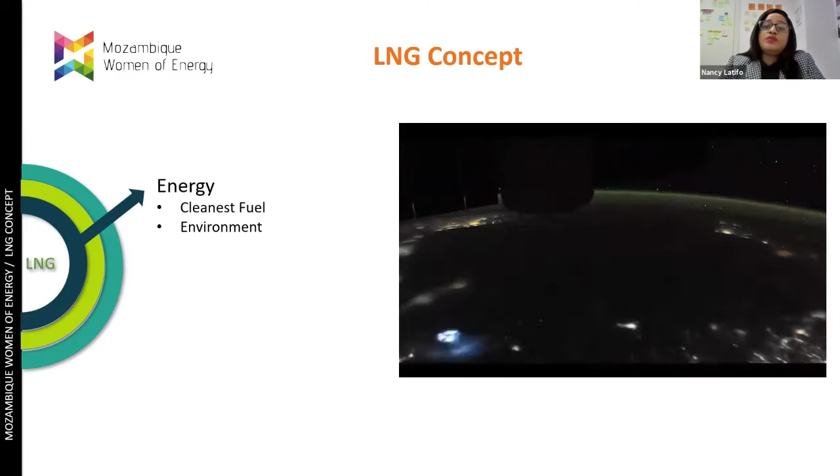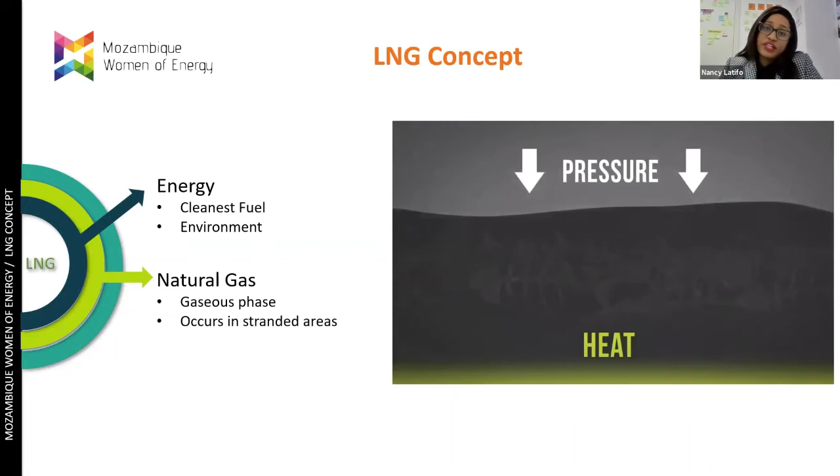Natural gas is basically composed of methane with smaller quantities of other hydrocarbons, and was formed millions of years ago when dead animals sank to the bottom of the ocean, were subject to intense heat and pressure, and were kept underground for millions of years. That's where we have natural gas. This gas is normally found in rocks called reservoirs that have little spaces called pores, that keep the water, the oil, and the natural gas. These are kept in by the impermeable rock called cap rock.

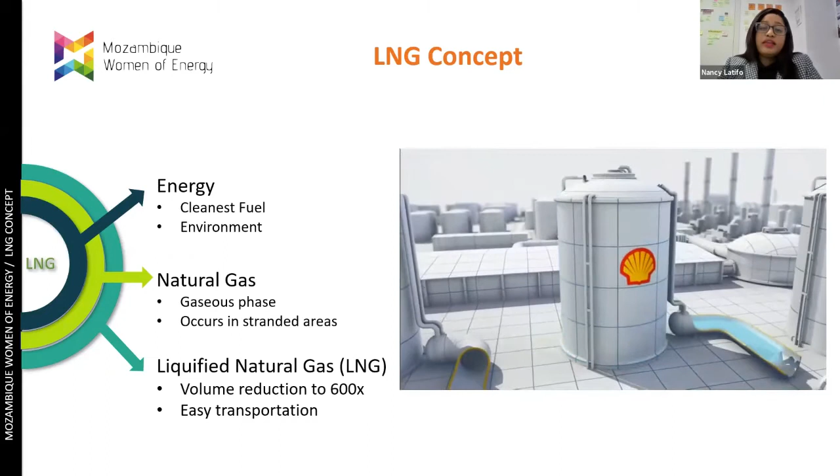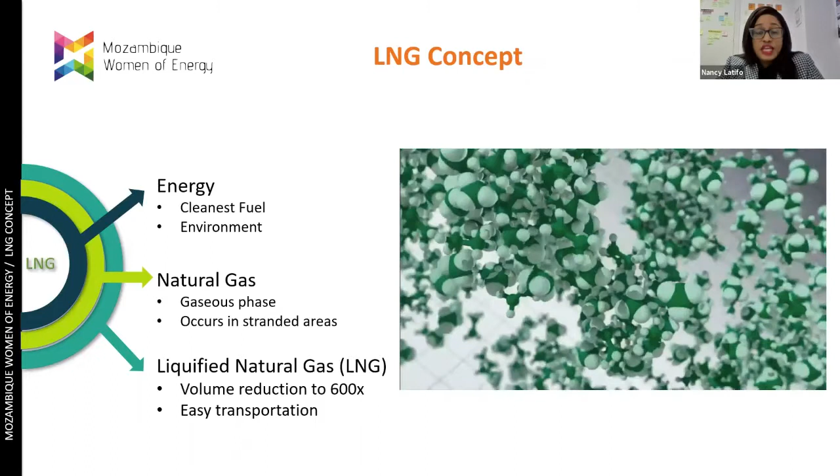So what is LNG? LNG stands for liquefied natural gas, and is the liquid state of natural gas after being cooled to an average temperature of minus 162 degrees Celsius. When we cool down this natural gas, we are solving the volume problem because we are reducing it 600 times, making transportation much easier and expanding the market of LNG. This LNG can be produced in two types of plants, onshore and offshore. And I will start explaining the onshore plant.

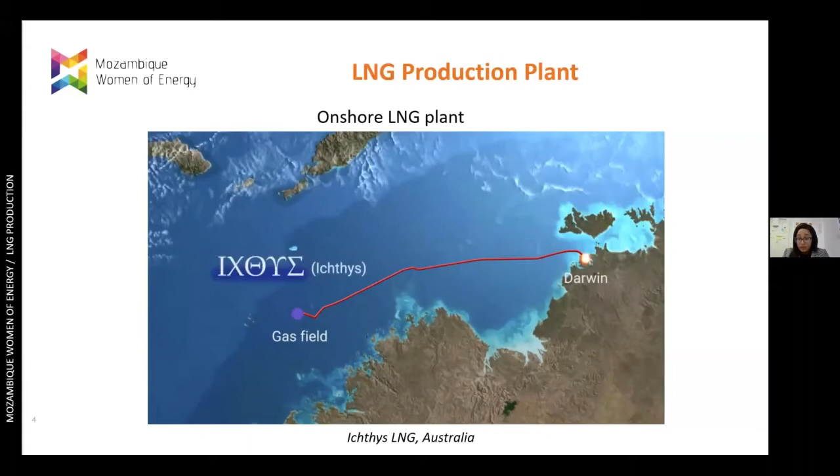And here we see the project in Australia. This plant is normally located on land, close enough to the shore to facilitate the offloading process. This plant has 2 liquefaction trains, making a capacity of 8.9 million tons per annum. The operator is INPEX with Total and other Australian subsidiaries. This onshore plant normally occupies a lot of space because we need to make sure to respect the environment and the way we produce the LNG. The gas field is called Ichthys, and that's how the project came, and we call it Ichthys LNG, located in Australia.

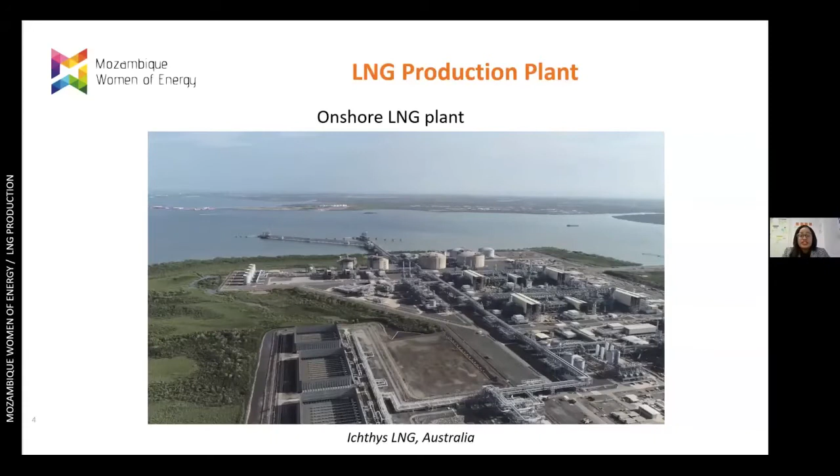This floating platform is normally located in the sea, close enough to the wells, solving in this case the problem of using much space to have an onshore plant.

The turret is normally the link or what joins the platform with the wells, and this is a fixed structure. In case of bad environment conditions, this platform can rotate to avoid damage to the infrastructure and the equipment, making sure that production and the way of operating this floating platform is not compromised.

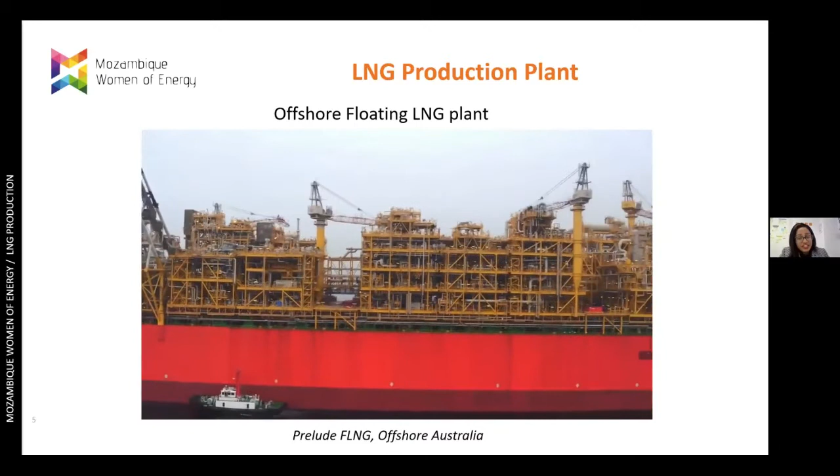For your curiosity, we also have the Coral South project, an offshore plant currently being constructed in South Korea by Samsung in consortium with Technip and JGC. This platform will have a capacity of 3.4 million tons per year, a little less than Prelude, but it will be the first LNG ever built in Africa, which makes Mozambique a really great potential to explore natural gas.

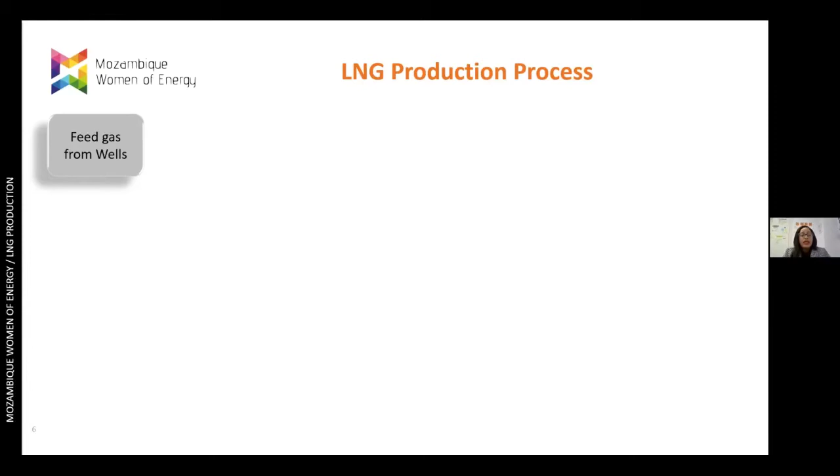Now let's take baby steps and start explaining the way we can produce this LNG. The gas comes from the wells, enters the FLNG, the onshore or offshore plant, and goes to the first unit that we call the inlet receiving facilities.

In the inlet receiving facilities, we have the first separation because the gas comes with a lot of impurities - sand, slugs, liquids, mercury, and many others. It's important to remove these impurities to make sure that when we get to the heart of the process, we will only have methane, which is what we want to transform to liquid.

After this first separation, the natural gas is sent to the second unit, the pre-treatment. In the pre-treatment, we have a separation of sulfur, carbon dioxide, water, and mercury. These components have to be removed because of the operating conditions in the liquefaction unit.

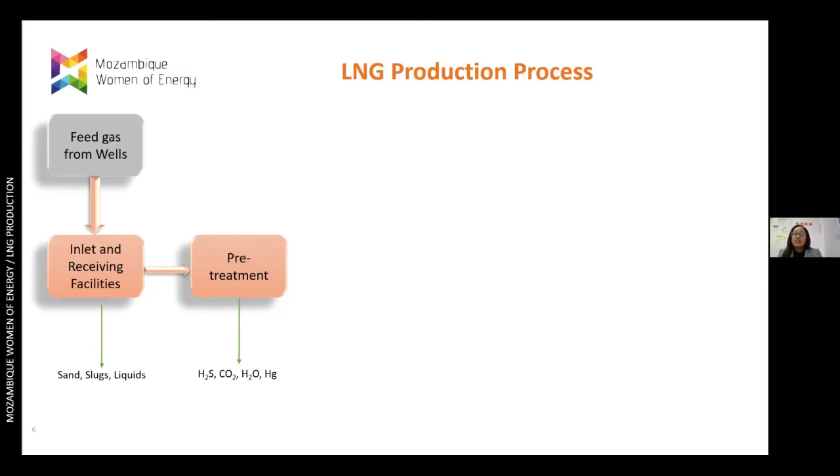After this separation, the natural gas is sent to the NGL Recovery and Fractionation unit, where we break down the natural gas into methane and the other components - ethane, propane, butane, pentane, and condensates, which is pentane plus. These condensates normally go to a specific treatment, or can go to storage that can later be offloaded.

The NGL recovery - here I'm talking about the refrigerants that will be used to liquefy the process in the liquefaction unit. After this, the natural gas is sent to the heart of the process, the liquefaction unit, using the refrigerants that were recovered in the NGL Recovery and Fractionation unit.

After liquefying this natural gas, we have the LNG. We store this LNG in the tanks until the offloading to the LNG carriers.

All of this that I explained here is called process units. These process units normally require utilities - water, air, nitrogen, and some other chemicals. If you want to cool down the temperature in any of these units, we need to use water, so in this case water is considered a utility.

If we want to make an inert environment in the storage tanks - why? Because we are sending a liquid that is at minus 162 degrees Celsius to a tank, and if we don't create this inert environment, we will create an explosion. To create this inert environment, we inject nitrogen, so nitrogen here is also considered a utility.

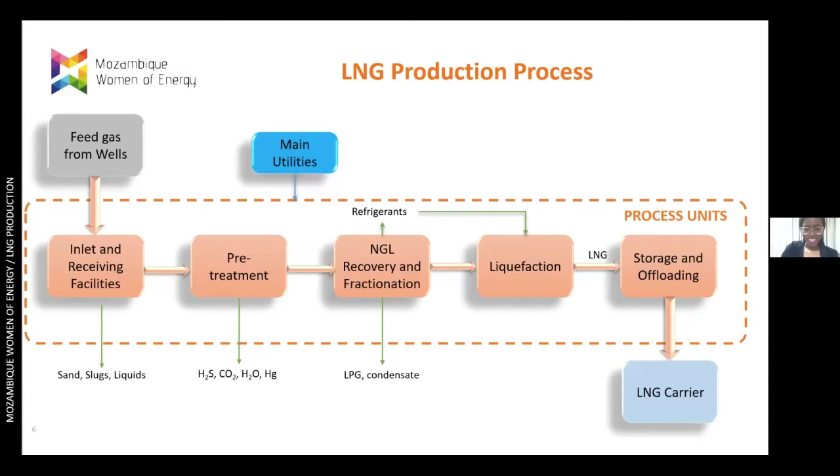To have a better understanding here, we can compartmentalize this, or categorize this equipment into block flow diagrams, starting with the inlet facilities. There you see the equipment that I'm going to talk about, which is the interface between the subsea and the production plant.

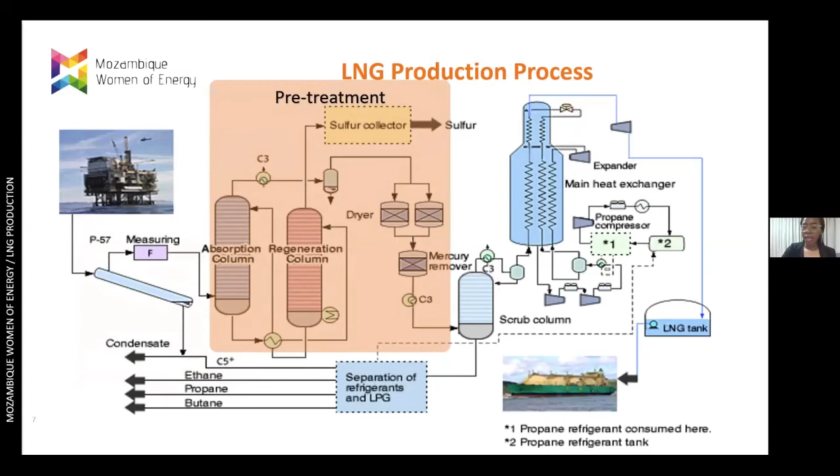Then we go to the pre-treatment part, where we're going to treat our gas in an acid gas removal unit, into dryers, and into mercury removal, to remove the acids, the water, and the mercury. After this, we're going to separate the components of the lean gas, the natural gas, which is going to be the methane from all of the others, C2 plus or the other natural gas liquids.

Our natural gas will pass on to the liquefaction, which is where the gas is cooled and then liquefied. After, it is expanded to be stored in an LNG tank, where it stays until it is offloaded using an LNG carrier.

One thing to consider in this process flow diagram is that this is just a general representation of the process. It does not mean that every LNG plant is going to have the same representation, the same number of equipment, or even the same technology.

What is at play, what is considered when we want to design, to choose, and to have an LNG plant, is the conditions of the gas that you have, the composition of the gas that you have on the well, the capacity that you want for your plant, and the technology that you're going to use.

So now we're going to get into detail on each of the blocks I've shown here, so we can see how the natural gas stream flows into all of these equipments and units until it is liquefied.

Let's kick off with the inlet facilities. Here we have the gas coming from the well at pressures that vary from 80 to 120 bar. This gas enters at temperatures with a very high interval, which depends as well on the conditions that we have on the well.

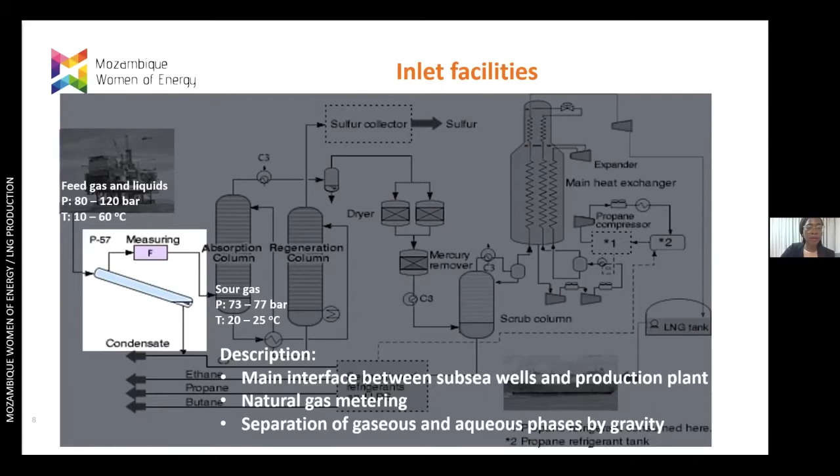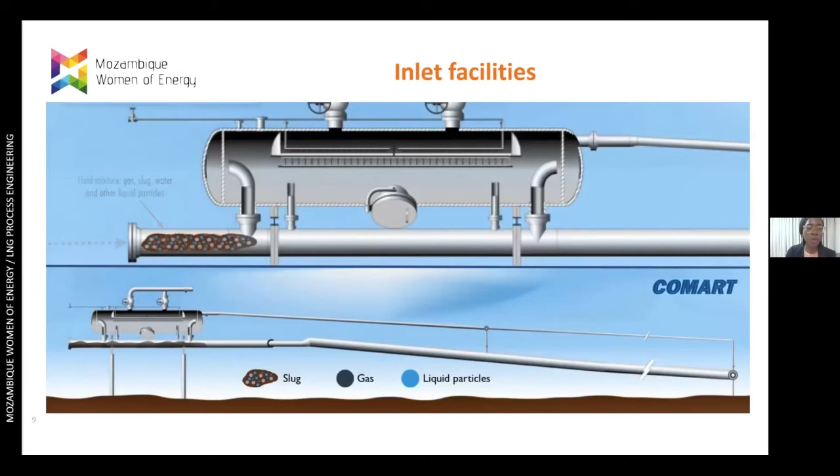A slug catcher can be represented by this drawing or this video, where our natural gas comes in through the tubular part. The natural gas here is a mixture of gas, slug, water, and other liquid particles. This flows through the tube as it goes.

As shown in the video, we see some gas and water particles. Because they are lighter, they flow into the vessel that is on top of these tubes. Here it's important to note that these liquids and gases flow into the parts of the baffle, and then we have a first separation of the liquids and the gases.

The gases will then flow up here to go to the next unit. There's an important part here called the demister, which has a wire mesh that helps all of the liquid droplets that have been evaporated into this vessel to fall back down, because what we really want is only gas.

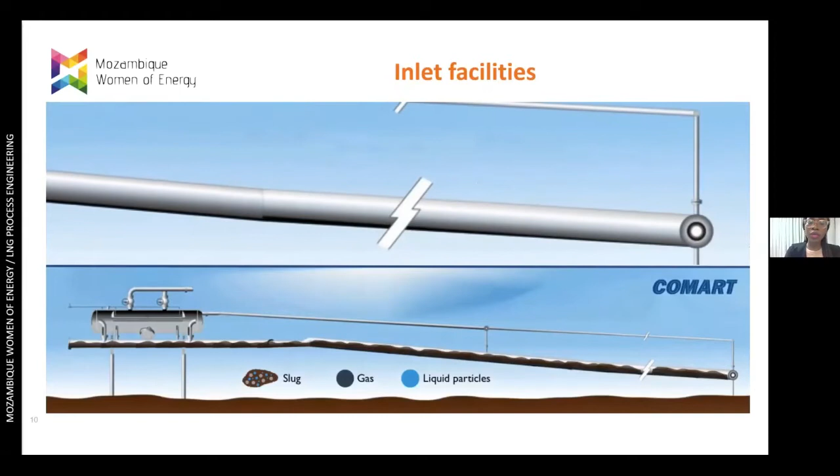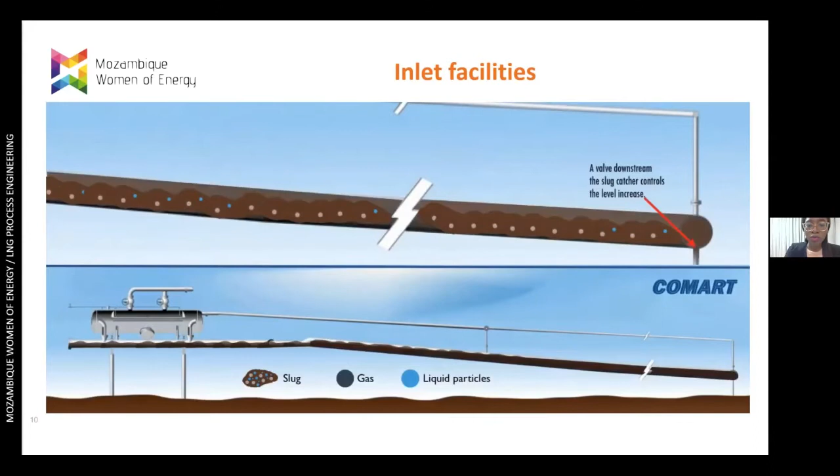So what happens to the slugs? This slug is just liquids and meg, and it can be water as well, which we have in our wells. This flows through this tube up to the end. These tubes are also used to keep the volume of this gas controlled. We have a valve downstream that controls this volume, along with the liquid and gaseous phases. Some of them will flow upwards through gravity because they are lighter, and will run back to our slug catcher.

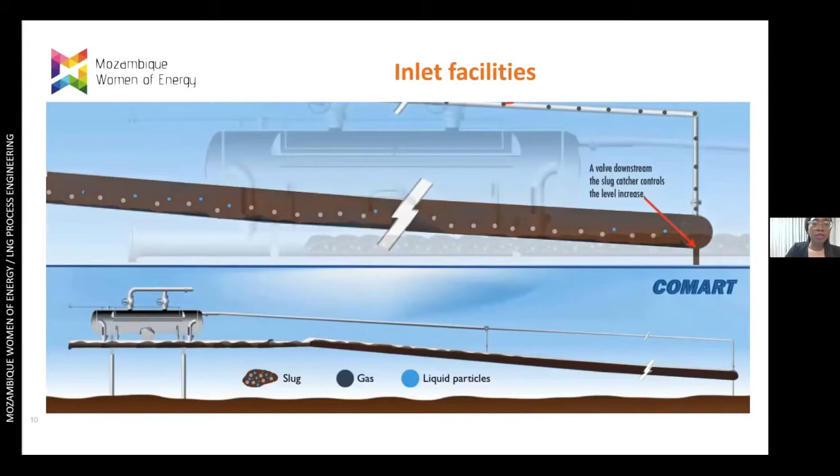Before going to the process part, they are let down here on this demister as well. Now we have our gas free from the aqueous phase and the other liquids, which are condensates.

We now have to start the pretreatment process of our plant. We'll start here with our gas, called sour gas, because it's full of acids like hydrogen sulfide and CO2. So it's called sour gas. It enters at pressures up to 77 bar gauge, and the temperature is not higher than 25 degrees.

We need to make sure it gets into these conditions so that heavy hydrocarbons are further separated here, so as not to create foaming in the acid gas removal unit, nor in the regeneration unit. This gas is going to be stripped of all the acid, and it will leave the column as sweet gas, which is the gas without these acidic particles.

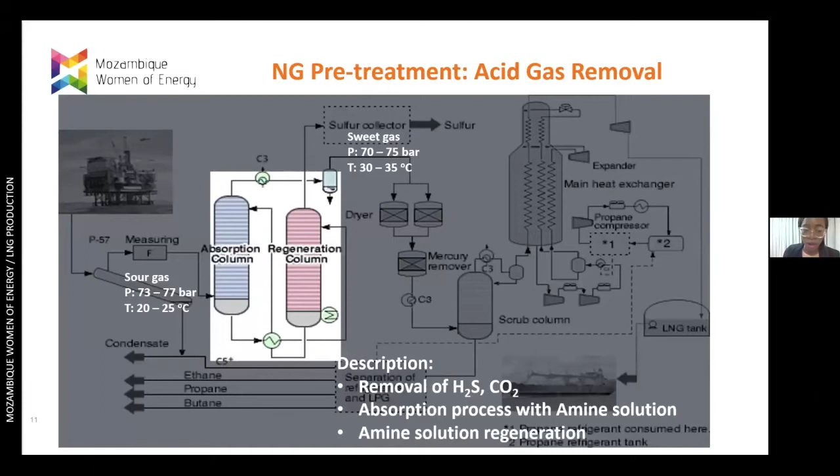This is done through a process called absorption, which happens on an absorption column with an amine solution, which is then regenerated on a regeneration column. This is the gas skid, where we process our natural gas.

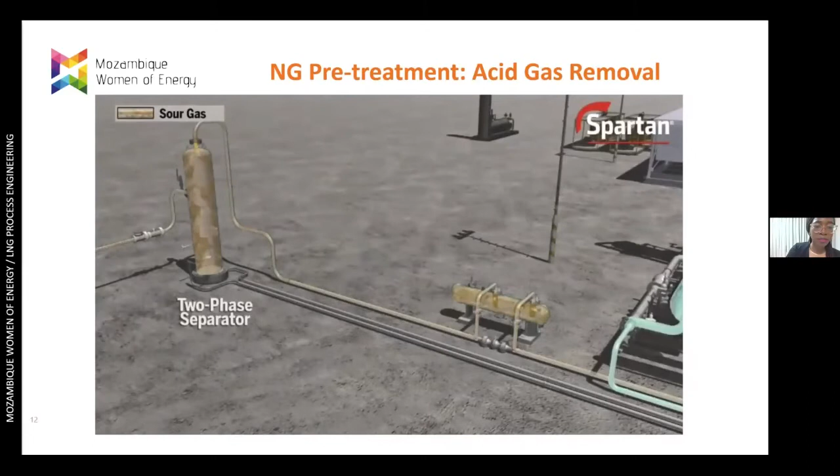What happens first? We have that first separation on a two-phase separator, where the liquids are separated from the gas. We then pass through a filter separator, and then onto another fine filter separator to remove all of the particulates in our natural gas.

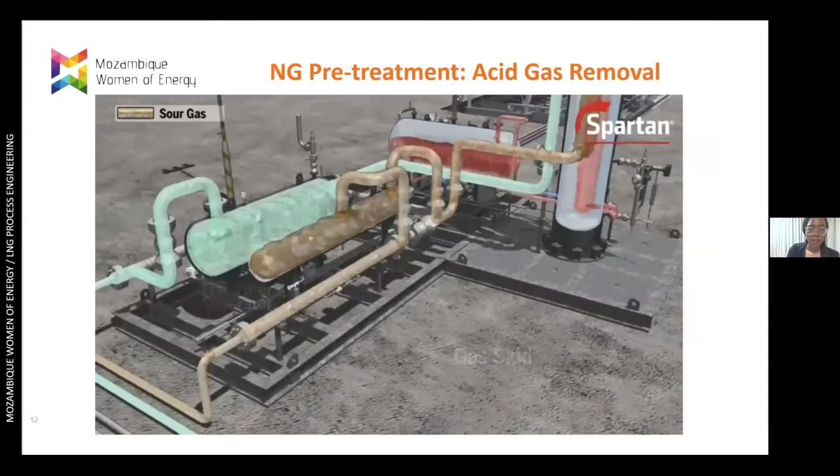This natural gas flows onto the acid gas column, where it flows upwards, and an amine solution enters the column from the top to the bottom. Here we have contact between the two, where the amine absorbs all of the acids present in the sour gas.

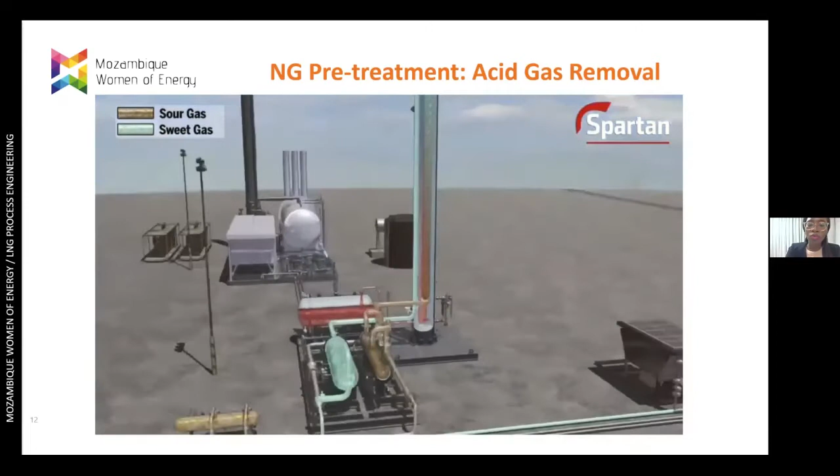This is an exothermic reaction, that's why we need to start with a low temperature. The gas here, which is sweet and without the acid, leaves at a higher temperature. It's further separated in an after scrubber, and then flows to be cooled, to be relieved of the heat gained through the exothermic absorption process that happened in our column.

Now, we call the amine full of acids the rich amine. This rich amine needs to be regenerated to be used again on our acid gas.

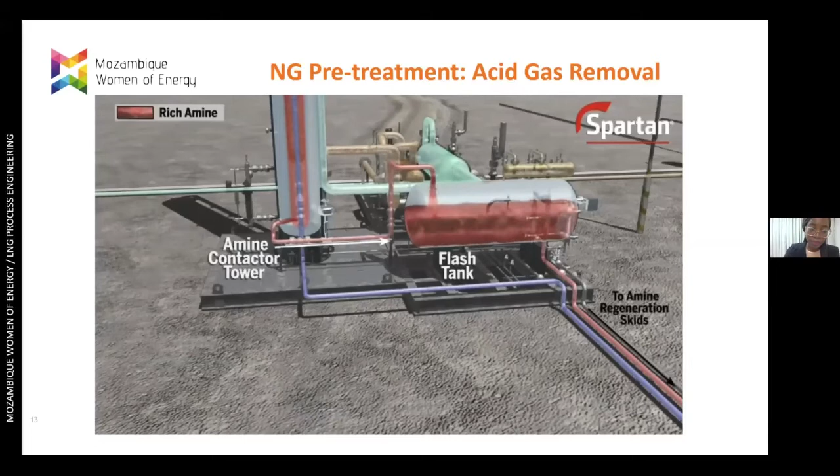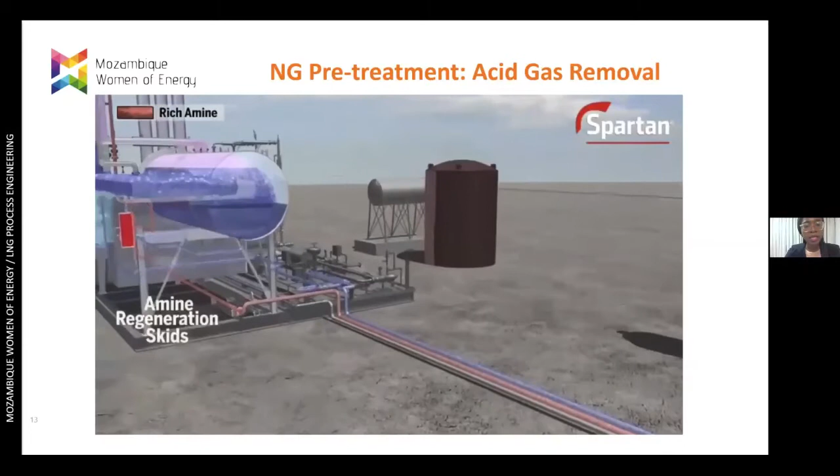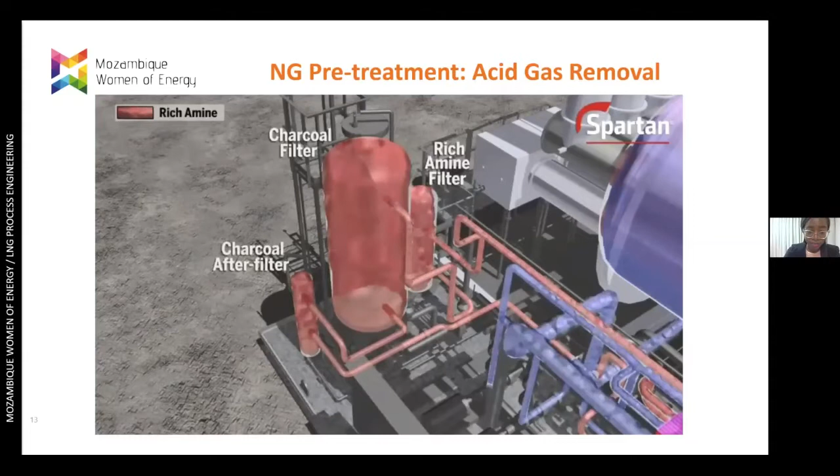How does that happen? First, it goes through a flash tank where gaseous phases of the rich amine are flashed, and then it moves onto a filter process. Here it's filtered first to remove particulates, then we remove the hydrocarbons on the charcoal filter, and finally we remove the charcoal particles on the after filter. This removes all the impurities from our rich amine, prior to being heated on a plate fin heat exchanger and going into the still column.

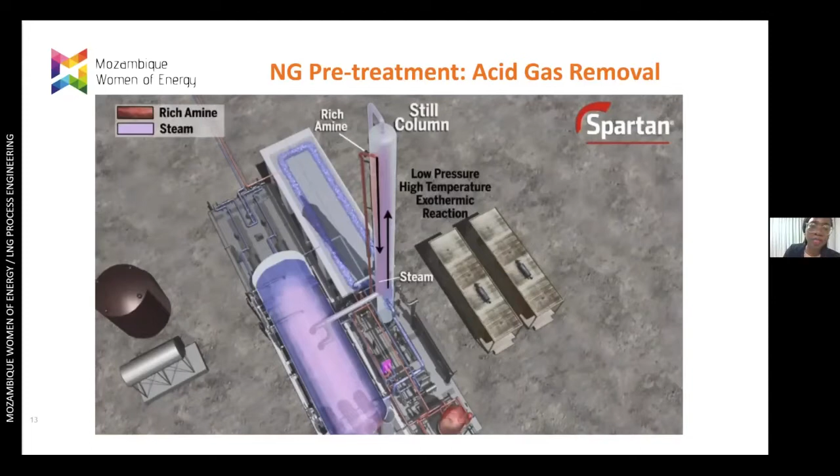Here, all the acid is stripped using steam. The stripping process is basically where steam absorbs all of the acids from the rich amine, and it leaves as a lean amine. This goes to a direct fired boiler, which is a heat exchanger. We put heat into it so that it can transform into steam.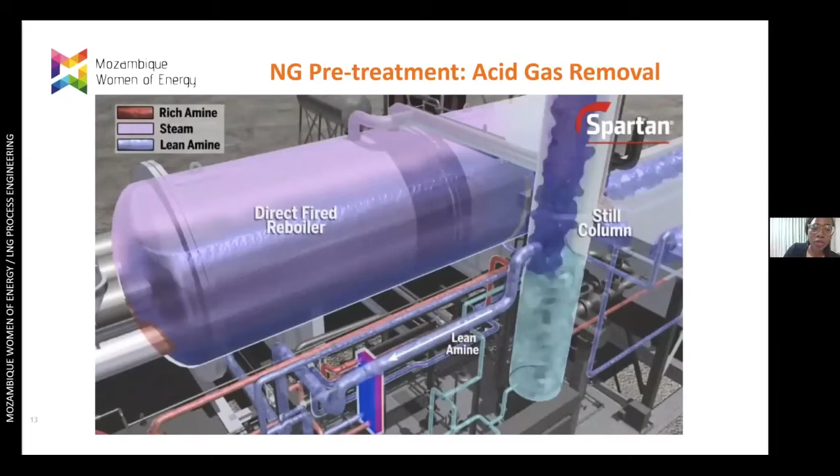This same steam is going to flow into this still column from the top to be used as a reflux. So this is going to be condensed first, and then it's going to get in there as a liquid.

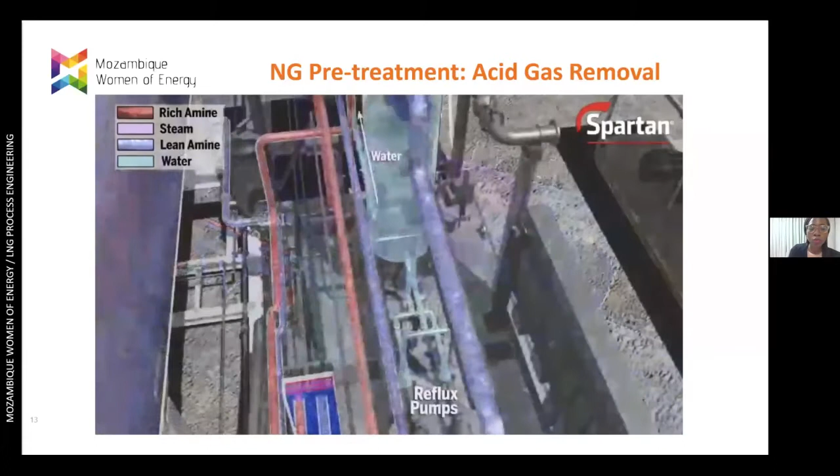We pass this into an accumulator, and the water that is down is going to be removed from the system, and the acids will also be removed to be further processed in a dedicated facility. This water is going to be reinjected into the rich amine to be further processed in the column once again.

Now, on our direct fired reboiler, we still have our lean amine there, which is going to flow through that weir, and it's going to be cooled here on the same plate and frame heat exchanger that heated the rich amine. After this, it's going to be cooled again.

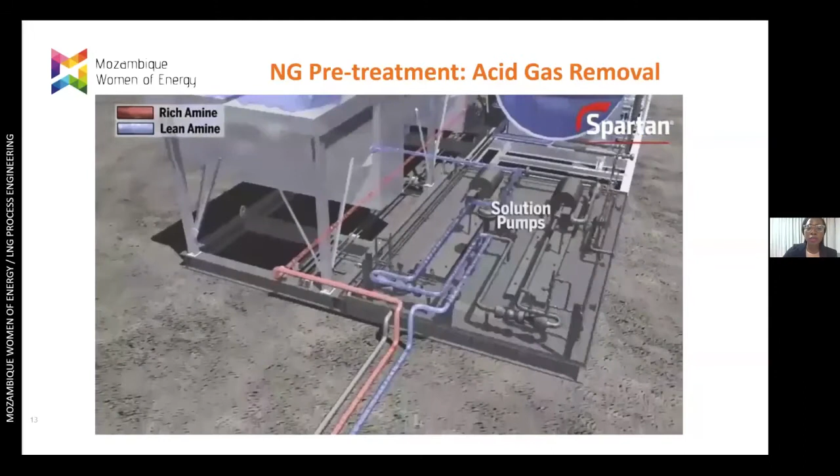As you know, the temperature that we use in our acid gas removal is low, and this goes to the gas skid to remove all of the acid from the gas again. So this is the regeneration process of the amine.

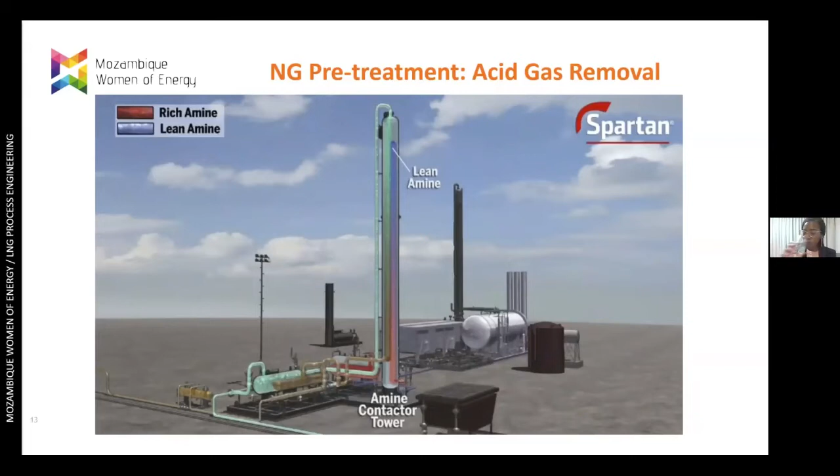With that said, we have our gas sweet going into the dryer. This is the second step of the pre-treatment, where the sweet gas enters at pressures ranging from 70 to 75 bars and temperatures not higher than 35 degrees. Here, water is going to be removed so as to avoid freezing in the liquefaction units, where we have cryogenic temperatures.

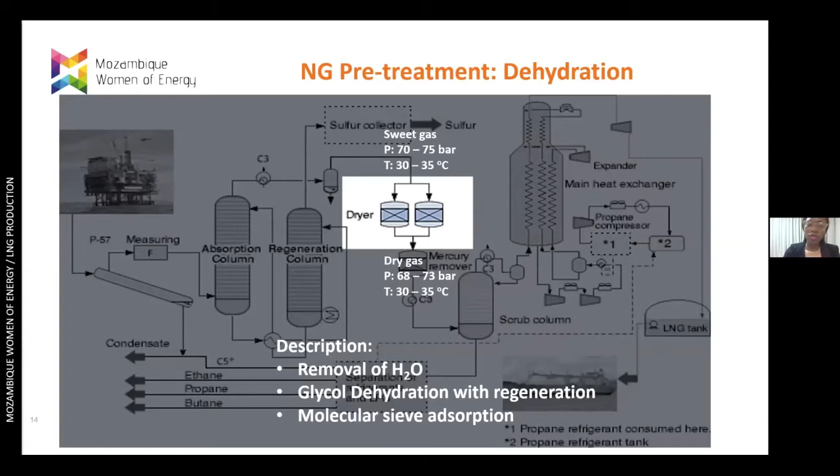This process that goes on in these two dryers is called glycol dehydration with regeneration, but we can also have another technology used, which can be the molecular sieve. So dehydration is basically removal of water.

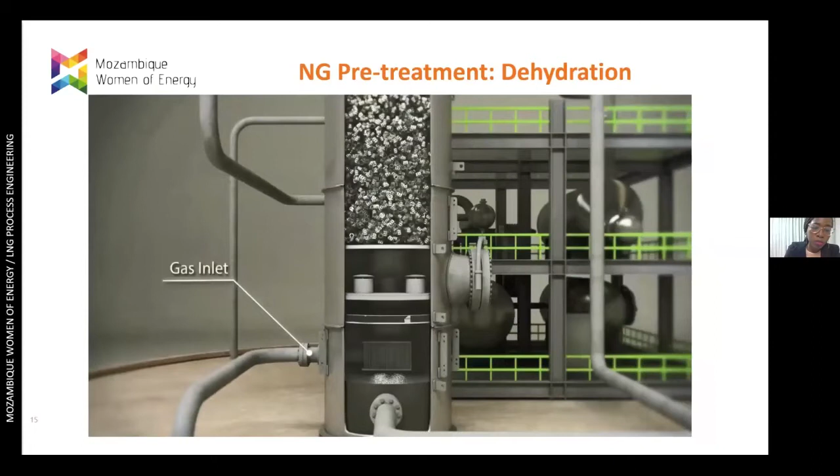This is done on a dehydration facility where our gas, which has hydrocarbons, also has water, some impurities, and other gases, which will be further removed in other processes. This will all flow on the bottom of the column, and from the top, we're going to have our glycol solution.

This is going to enter in contact, and the pure glycol is going to absorb all of the water and finally be regenerated in a process similar to the regeneration of our rich amine to produce the lean amine.

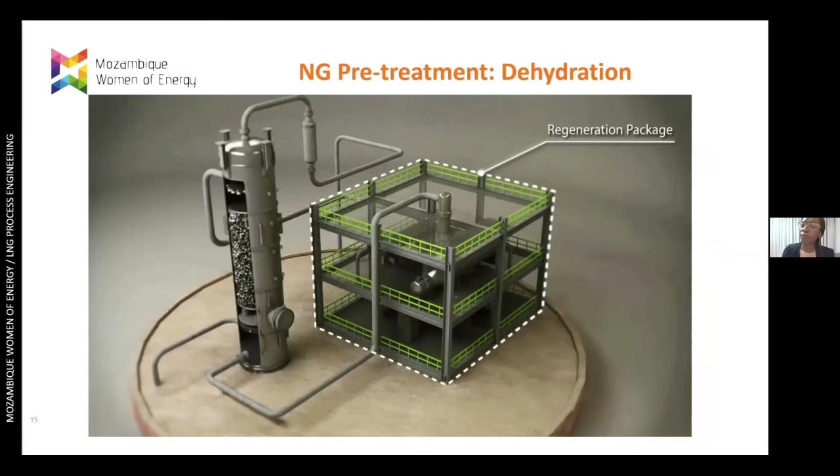Another way that we can perform the dehydration process, which is the removal of water from our natural gas, is through the adsorption process. This adsorption process can be done by inserting some materials onto beds, onto this part here which was supposed to be the piping. This material can be alumina types or molecular sieve.

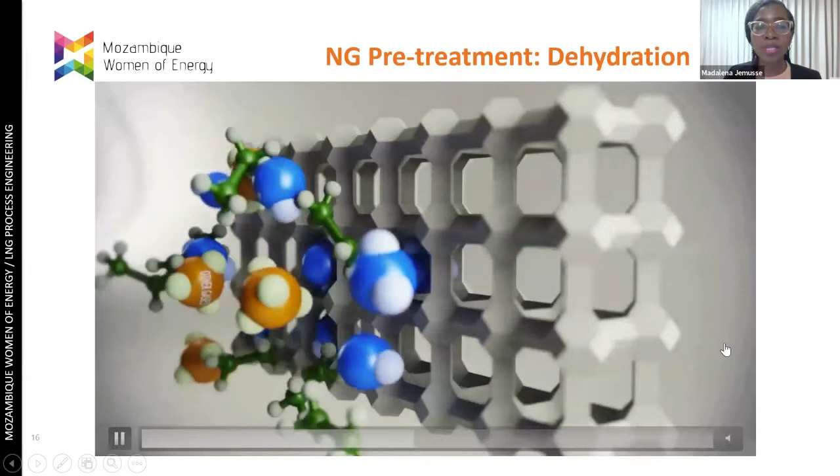What these are going to do is basically trap the water onto their surface and let our gas pass through. This is done through an adsorption process, which is basically the process where particles or molecules attach to the surface of the material, the adsorbent, and let pass all of the other gas that we need, in this case to be free of water.

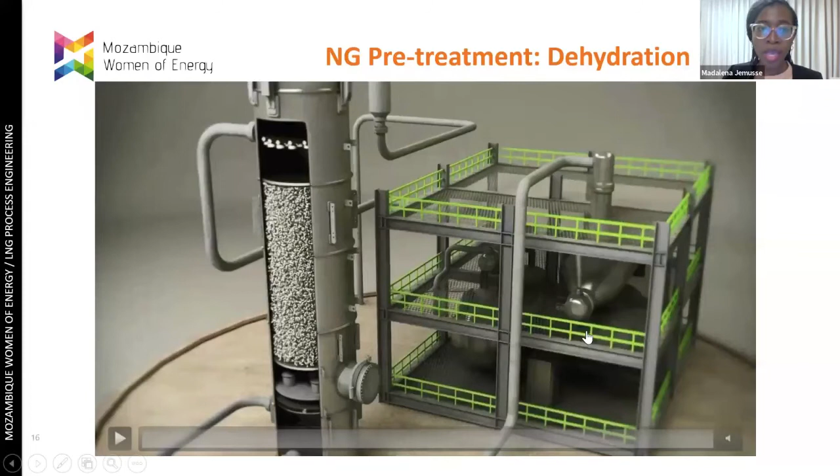The last process for the pretreatment is the mercury remover. Here we have our gas entering the mercury remover at pressures of about 73 bars. We need to remove this mercury because it can cause corrosion issues in the pipes or equipment in the subsequent units.

The process that happens here is the same as what happens in the dehydration adsorption process, where we have a material on a bed which is going to adsorb onto its surface all of the impurities we want to remove. This is a rather simple process.

We have here a vessel, packed with a certain filling structure containing the adsorbents. The gas is going to pass through it and adsorb all of the mercury onto its surfaces, and the gas is going to move out in a cleaner state, free of all the impurities.

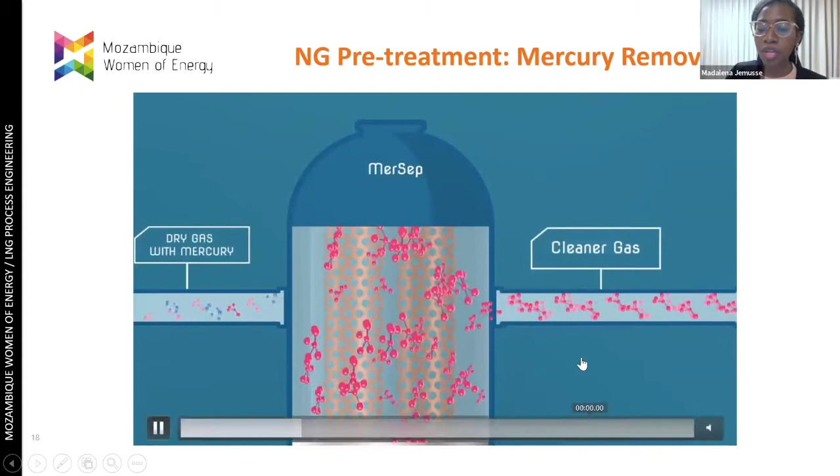We have now removed all of the impurities from our gas, but we need to be aware that natural gas is composed basically of methane. Our gas is composed of hydrocarbons, molecules that have carbon and hydrogen. What we need is methane, the hydrocarbon with one carbon, while the other components can have two carbons, three carbons, four carbons, and so on.

So the first stage of our separation here is to separate the methane, which has one carbon, from all of the other C2+ components, which are all of the compounds that have two or more carbons in their structure. This is done through a process called distillation, carried out in a distillation column.

Here we make the first separation where we separate the methane from the other constituents. These other constituents, called natural gas liquids, can also be further separated between themselves to have pure components. These components are ethane, propane, butane, condensate, and in very low quantities, other kinds of components like C6+, which is benzene, etc.

We make these separations of the natural gas liquids because we can use the ethane, propane, and butane in the process itself as refrigerants, or we can sell that and transport it for other applications, like the gas we use in our kitchens. I also have the condensate, which is transported as a byproduct and mixes with the condensate coming from the inlet facilities after it has been stabilized, then it goes to the market to be further processed.

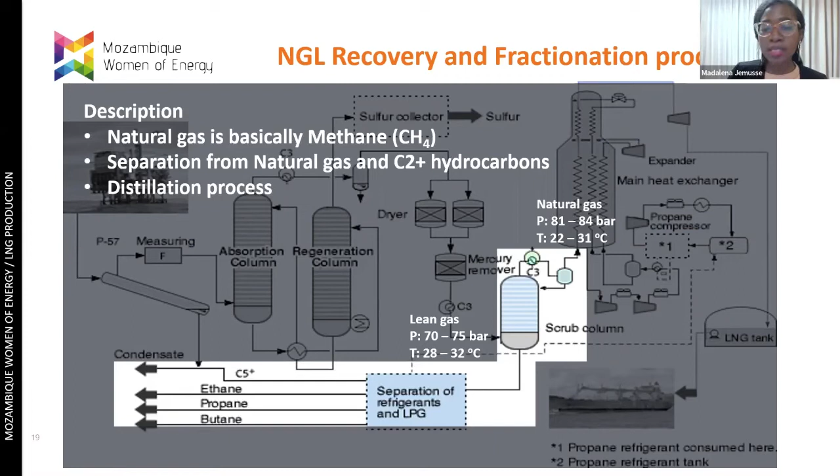The distillation process starts by cooling the gas in a heat exchanger using a refrigerant. Here we make this first cooling so as to condensate the heavy particulates.

But to have a very good condensation, we pass this through an expander where the temperature is brought down to -100 degrees Celsius. So we have a cryogenic mixture, a cryogenic liquid, which goes to the demethanizer to remove the methane that we want, which is our natural gas.

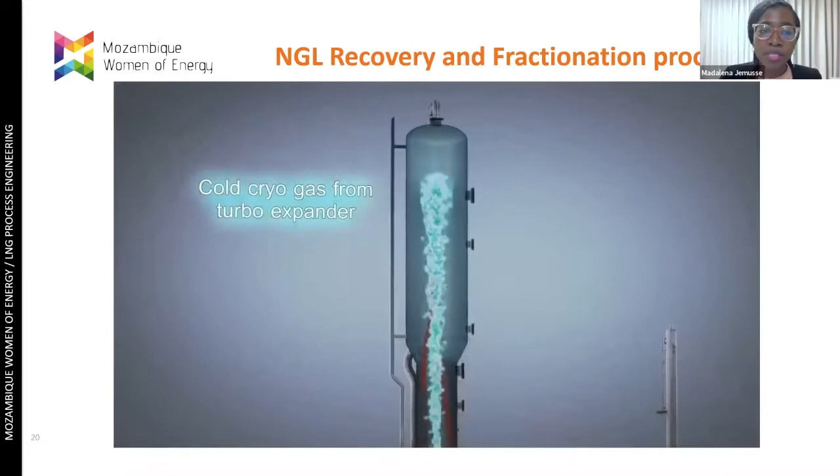This happens by putting this cold cryogenic gas from the top of our demethanizer, and this flows down in countercurrent with the warm gas, which is going to strip all of the methane out of the column. This leaves on the top here what's called residue gas, going to the turbo expander.

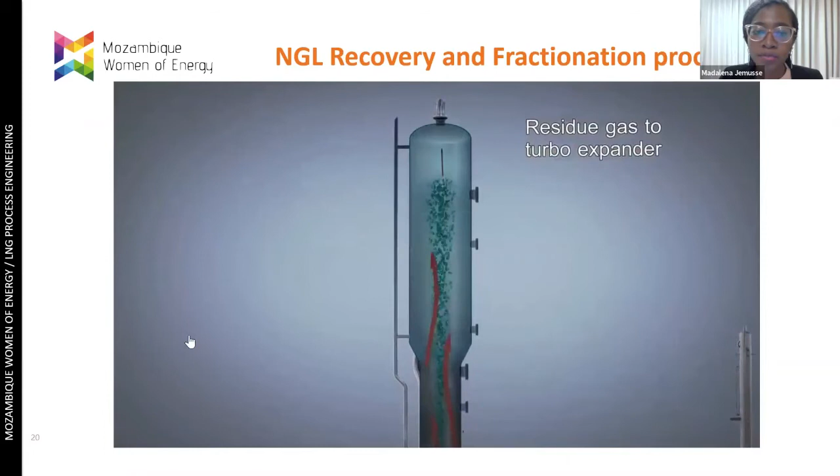This residue gas, in this case, is our natural gas, which is going to go to the liquefaction. Before that, we can put it again in a turbo expander here and send it to the subsequent unit, which is the liquefaction. What happens with the natural gas liquids?

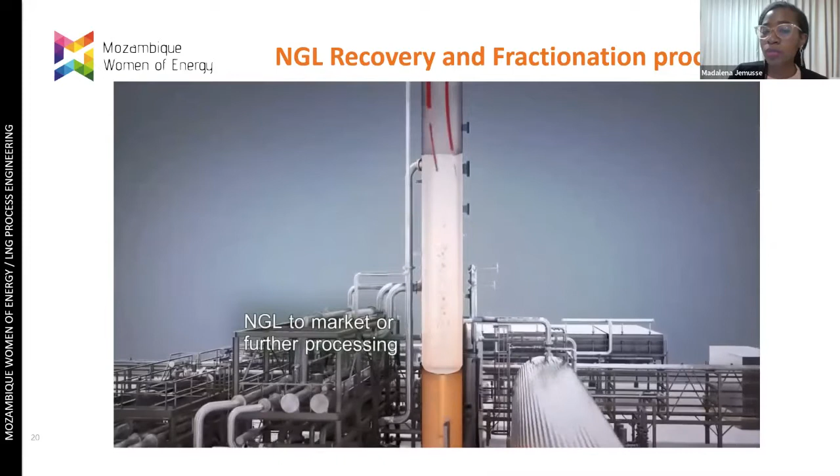The natural gas liquids can be separated into each component, as I explained before. This is done on different types of columns, but with the same mechanism, the distillation columns, which can be called the deethanizer, for instance, if you want to remove ethane.

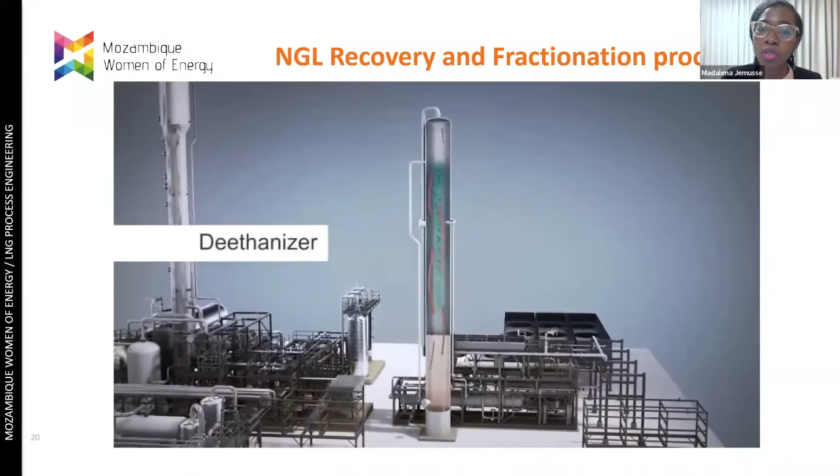What happens basically is you have a cold liquid coming from the top, going down and going in countercurrent with the warm one, which is going to strip all of the ethane to then be further processed or used in the plant.

The NGL can be sold to the market, or can be stored until it can be offloaded, as well as condensate or other differentiated components, meaning LPG, for instance. In this case, the ethane, propane, and butane are further processed in the fractionation unit.

Here we have our liquid flowing in the column, and the bottom part goes to a reboiler so that it can be heated. Here we can use a heating medium like hot oil, for instance, to heat this natural gas so that it can get into our distillation column as vapor.

This will flow inside the distillation column, where you can see structures we call plates. These structures can be plates or packed beds. Their importance is basically to increase the area of contact between the vapor and the liquid we have here, because if we have higher contact between the two, the vapor is going to take with it the lighter components, and the liquid is going to drag all the heavier components down.

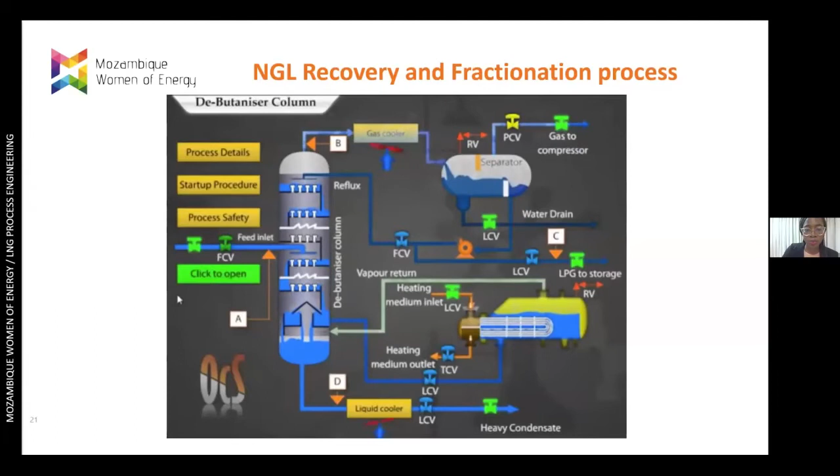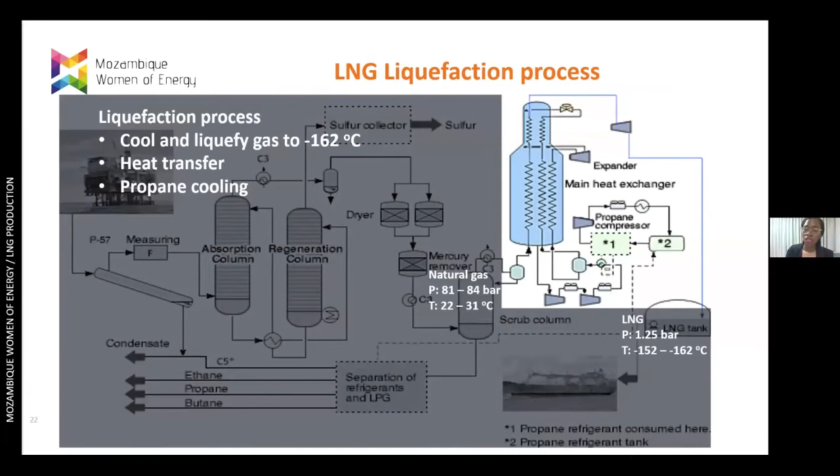After this, we have the separation of the mixture. We have our natural gas, full of methane, with the majority composition being methane. This methane needs to be liquefied.

Okay, so now we have our natural gas composed majorly by methane, ready to go to the liquefaction process, where it's going to be cooled, liquefied, and subcooled so as for us to have our liquefied natural gas. This is a process that happens in equipment called cryogenic heat exchangers. These equipments are cryogenic because they cool, they liquefy the gas up to temperatures which are minus 162 degrees, which

is a cryogenic temperature. This is achieved through a process called heat transfer, which means that heat is transferred from one fluid to the other. In this case, the heat is going to be transferred from the natural gas to the refrigerant. The refrigerant is what is going to absorb all of the heat so that our natural gas can be cooled and finally liquefied.

You might be wondering, how does this refrigerant reach those temperatures and pressures or the conditions necessary for it to liquefy the gas? Well, this refrigerant goes through a refrigeration cycle, which is basically what happens in our refrigerators at home or our air conditioning, where you have a refrigerating medium, which is going to absorb all of the heat in the ambient that you want to cool, and then go through a certain loop so that it can always be at the conditions necessary to provide this cooling effect.

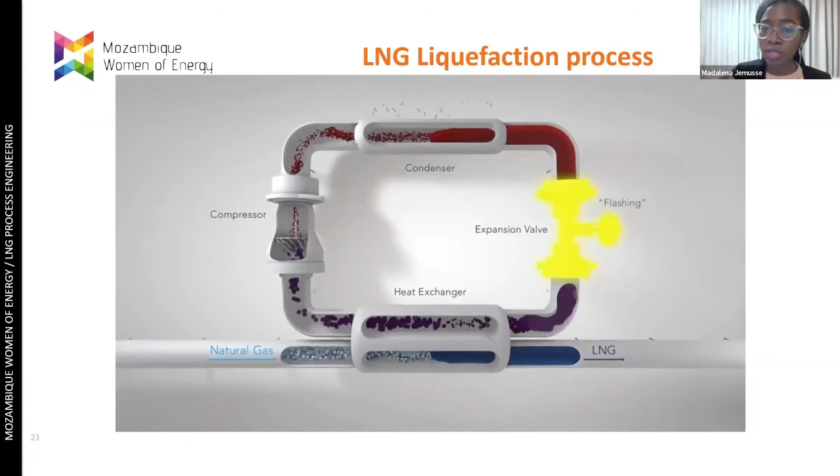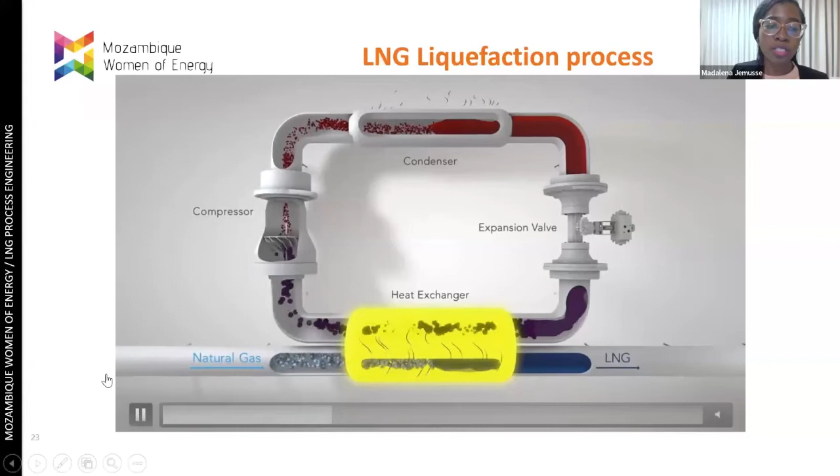And we have the formation of these liquid and gaseous mixtures that I spoke about, the two-phase mixture, through a process called flashing. In this case, our refrigerant is going to go through the expansion valve, it's going to be flashed, and it's going to be, once again, in the condition that we need to have our refrigerant coming into the heat exchanger. In this process, the natural gas is just going to pass by, giving its temperature, and it's going to be liquefied as we have our refrigerant in this liquefaction cycle.

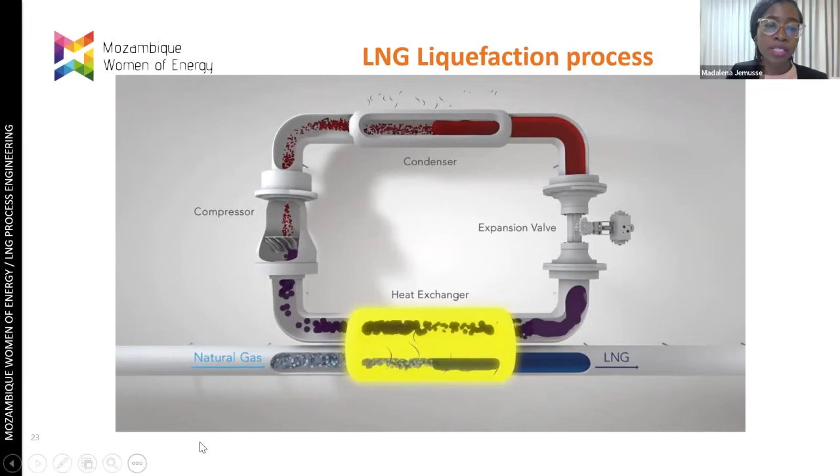This heat exchanger can also be explained on this drawing, where we see the natural gas passing in the first part, and then it's separated into two mixtures, one liquid and one gaseous, which is going to flow again inside of the cryogenic heat exchanger. The pressure is going to be reduced to near atmospheric pressure, and then here we're going to have further separation and pump this into LNG. This side here is the refrigerant loop.

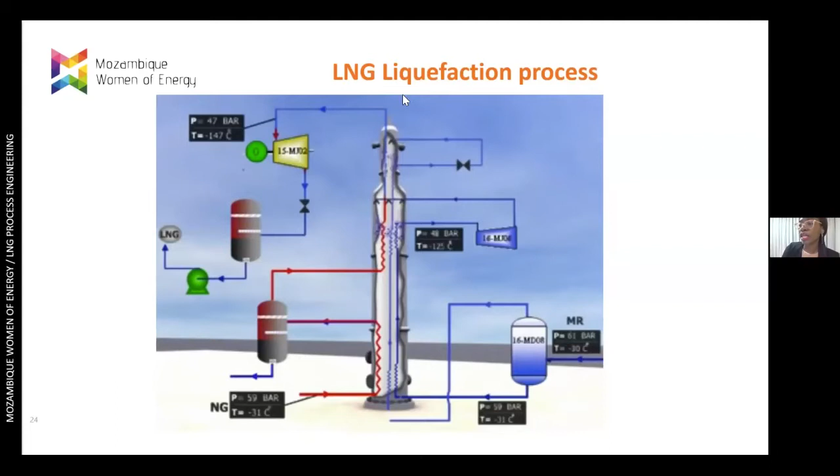On the refrigerant loop, we see here our refrigerant going inside of the main cryogenic heat exchanger. Here it is going to be expanded to be transformed into liquid as well, and cool our natural gas. The upper part is going to also come back in. It is going to cool the refrigerant itself, and then it's going to be expanded on a JT valve and move back again to the liquefaction. So you see here we have many passes of the refrigerant so that we can cool our natural gas and finally liquefy it to be used further.

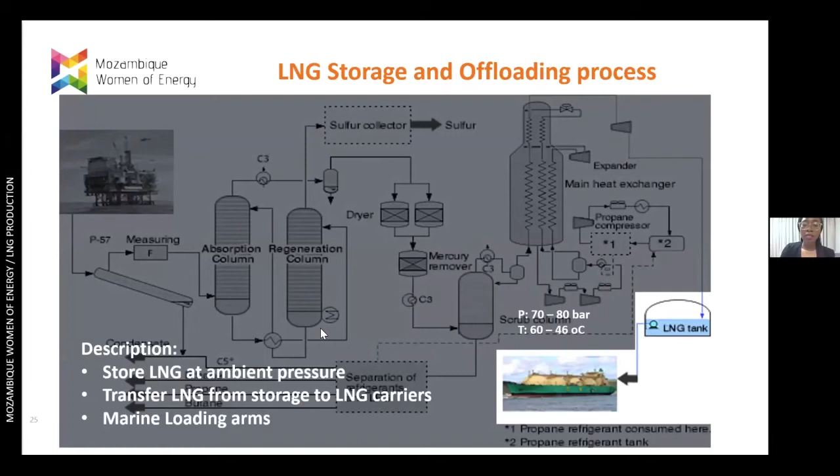This gas, after this process, needs to be stored. It is stored in LNG tanks, which are isolated tanks where the LNG is kept at pressures near atmospheric pressure, and it stays there until we have an LNG carrier to transport it to be further processed. In the tanks, we can see the formation of boil-off gas, which is the result of evaporation. And this boil-off gas is not discarded.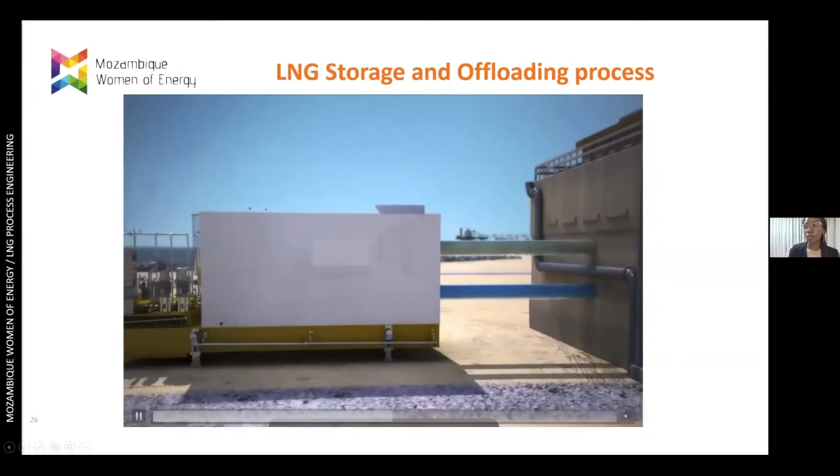As I explained before, this boil-off gas can be used to regenerate a molecular sieve, for instance, or the biggest part of it can be used as a refrigerant. It can be used in power generation to power gas turbine generators that are going to give power to all of the processes inside of the FLNG. Our liquefied natural gas is going to flow through the pipes up to our LNG carrier for transportation.

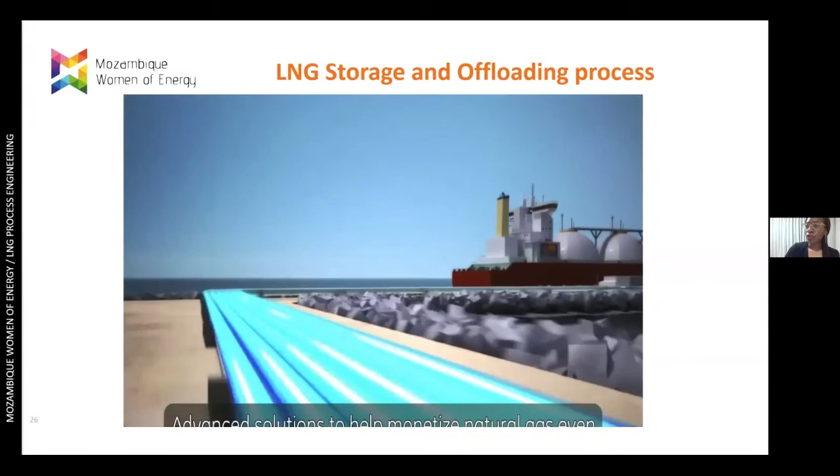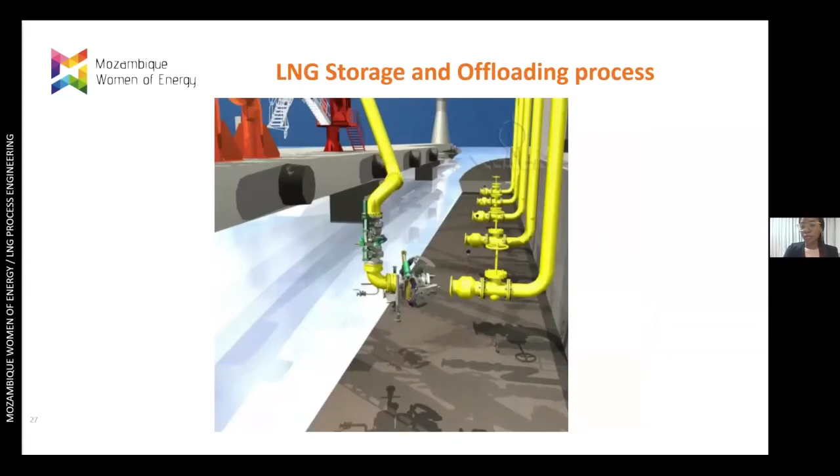A very special thing happens in the transfer of the LNG from the plant to the LNG carrier, which is the transportation through the marine loading arms. This is a very highly advanced technology where we have these steel pipes here, very articulated, that are connected. They are going to connect to the pipes of our LNG carrier. You can see that we need to have one good end termination here so that we can properly connect this loading arm to the LNG carrier.

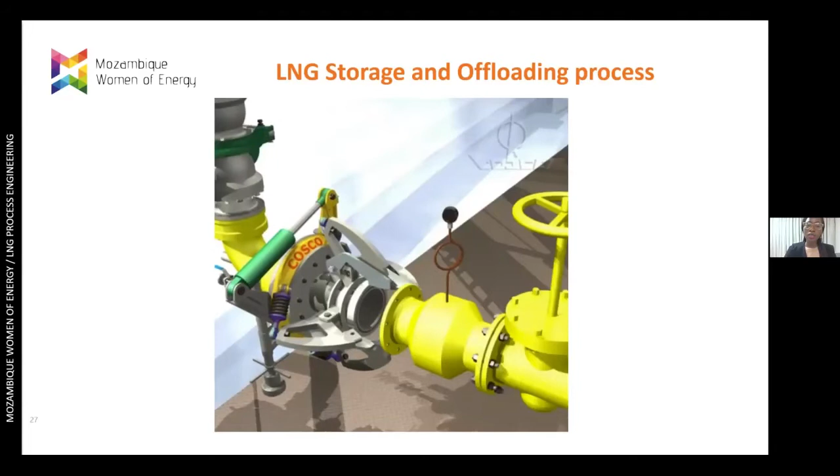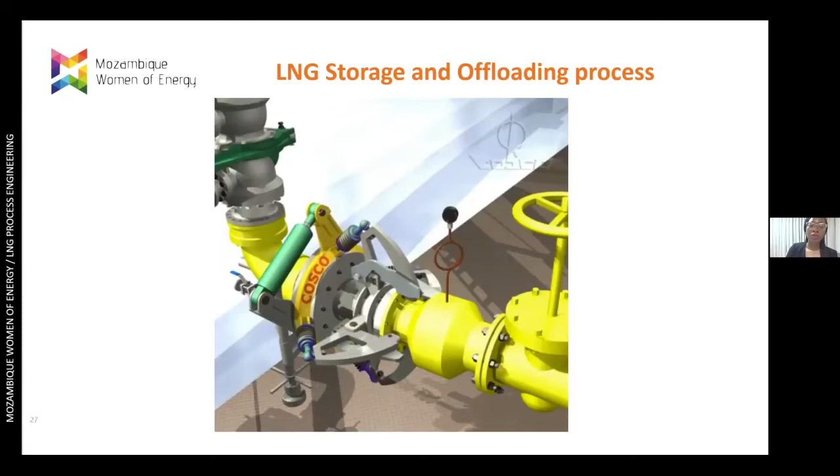So this pipe needs to be thoroughly insulated, and this connection needs to be made to make sure that we have no leaks. There is also a system that prevents leaks in case of movement of the LNG carrier or the FLNG. If it's moving, we can have a disconnection and we will not lose our LNG to the atmosphere. Well, we have our gas on the LNG carrier.

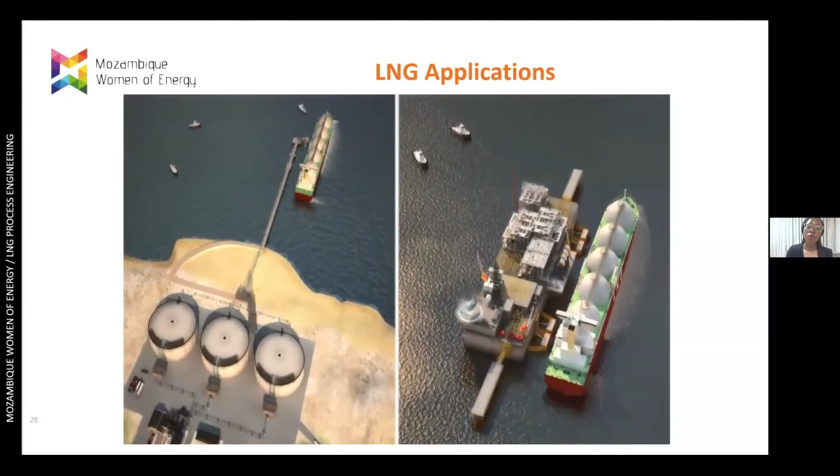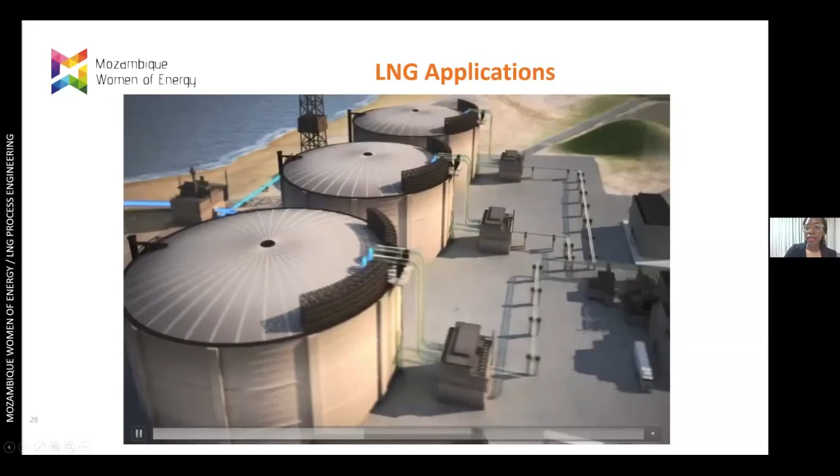The last step that we have now is to transport this gas through a ship, which is the LNG carrier, which is full of other tanks which guard this LNG. And this is sent either onshore or offshore, where this LNG is going to be offloaded for further processing. Here, this gas can be used for various applications. And this starts by putting it back into tanks here, where we're going to have some boil-off gas as well, which is going to be used for the plant that is going to regasify this LNG.

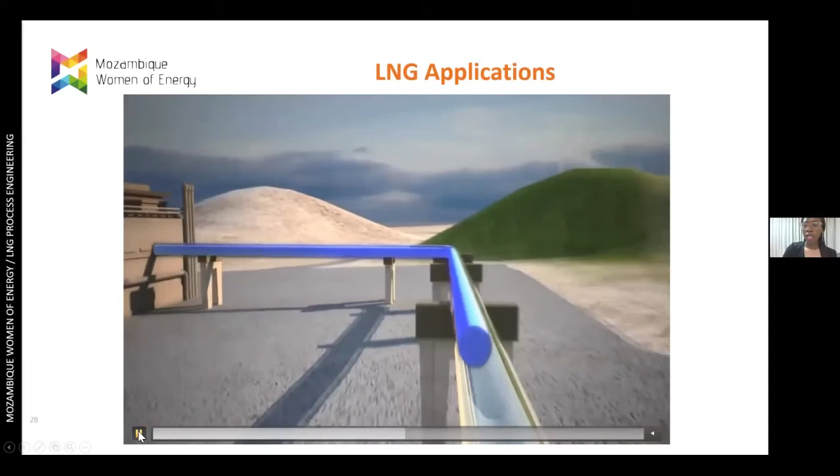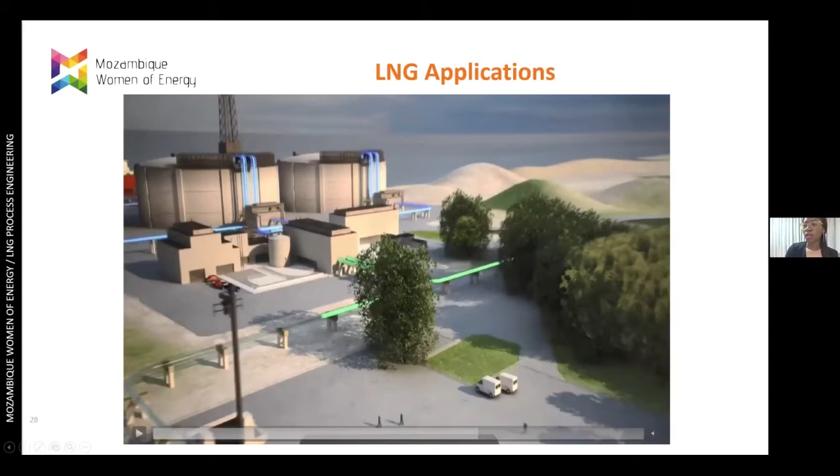Okay, let me go again. So here we have this LNG flowing onto a facility which is going to regasify the gas. As you know, the gas is at minus 160 degrees. So this can also be used to cool the cooling loops and the other big equipment that we're going to have in the plants where this is going to be processed.

So the LNG, when turned back into natural gas, can be transformed into other liquids. One example is the technology called GTL, which is gas to liquid, where we have this natural gas being transformed into syngas and finally being converted into liquid fuel that can be used as well for other applications.

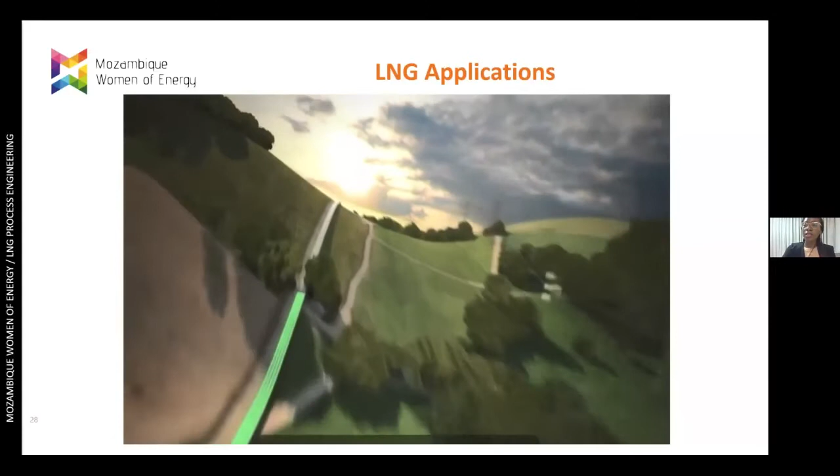But the biggest part of this regasified LNG is used for power generation. So this is going to move onto the pipes, and this is going to get to your homes, to your houses, and it's going to provide all of the heating and all of the energy needs that you need to develop our world. So that is all regarding the LNG applications.